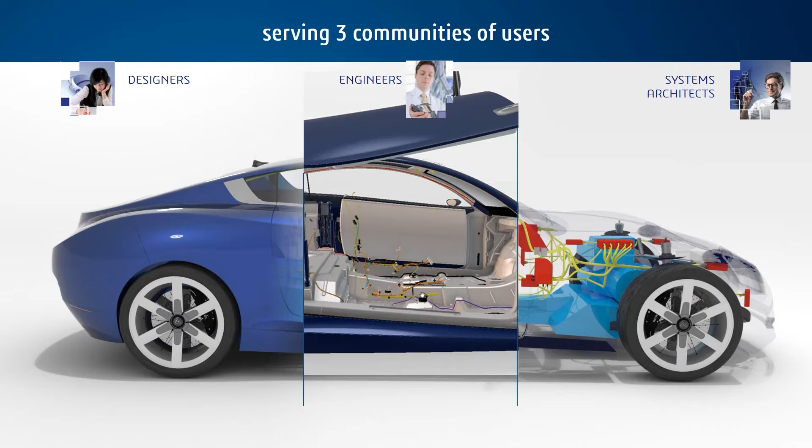How can we contribute to the Dassault success? We are serving 3 communities: the designers, the engineers, and the system architects. Today I'd like to focus, of course, on the designers, but with a strong collaboration to the engineers, because perceived quality has a strong collaboration needed.

But firstly, to understand, before we can move into that, we need to understand the trends and innovation trends of our customers, because those are the trends and demands for new visualization needs - for example, products inspired by nature, new generation of UI and UX, collaboration and social innovation, or new approaches of perceived quality, the topic of today, what we want to talk about.

So those are the drivers for visualization. That means visualization is key. But why is it so key, and why is it so important?

Visualization, nor VR, is not about just making things prettier. VR and realistic visualization is also a communication tool.

So let's have a look at this problem here, what you can see. You have a bunch of people who's talking to each other, and the first one is starting and the last one is totally thinking about something else. So that could be due to language barriers, due to different knowledge. A lot of things could happen why we have misunderstanding.

So communication is key and we need visualization for that. But not only that, it is an enabler for collaboration. Because if we have one common understanding on that level, since we can see a visualizing thing, everybody understands what it is about, and you can collaborate and work together more efficiently.

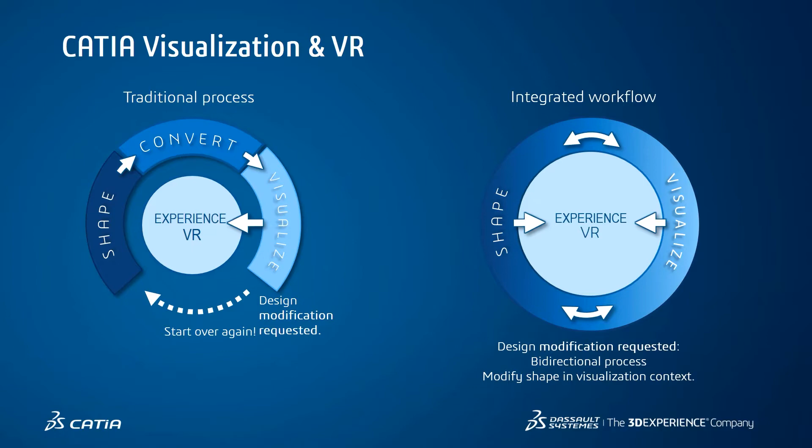So what is perceived quality? Perceived quality needs a lot of disciplines, and I think therefore we can really prove that perceived quality is a great example for collaboration and integrated workflow.

For example, the surfaces, to define the best design related to its functions. And the color and trim, look at that. The definition of the surface to the treatment to choose the best material distribution on the shapes. You have direct connection between both two things.

And then of course, gaps and flush, another direct connection to both, because that defines the product quality relating to its manufacturing process. And everything is related. So collaboration is key.

Not only that, those things are a great example of the design departments. There are other departments involved. I already mentioned that the engineers are involved, and we have a strong collaboration need for them.

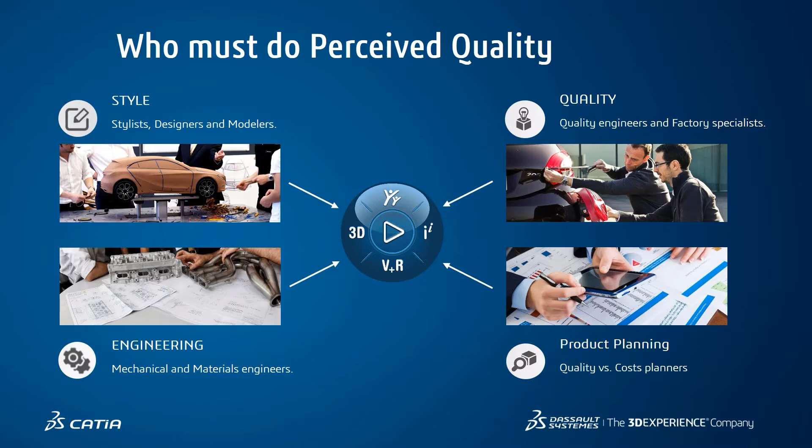Let's have a look when we do perceived quality. We like to do perceived quality in all R&D phases, from start to end. So let's have a look at the timeline.

And if we start with the design, going through the engineering phases to a full technical release, building our first prototype, and then starting to evaluate, can we do this for mass production, and doing our first physical prototype tests, our first perceived quality tests, we are lacking information here in the end. So if we really start that late, we have time issues in the end.

Let's do that everything digitally from the very start point and all the time. Within that, we can collect a lot of information to put into the first physical prototype and support these reviews later on.

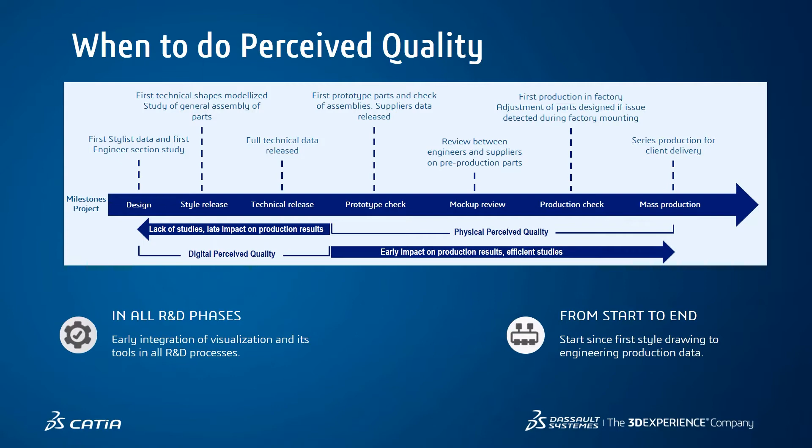So let's have a look at the overall process flow and a closer look between designers and engineers and which challenge comes with it.

So the designers are telling us or defining the overall design language, the colors, the trim, and of course they also define the gap distances. So they define what is acceptable from the design perspective.

The engineers then analyze and can simulate those things. They can evaluate, can we do it, can we not, can we do it like you want in the design department? And then the output could be a prediction based on the Monte Carlo simulation.

This can be done by the 3DCS integration tool. We'll see that just right away. But before we do that, both departments have a clear need of collaboration in the 3DEXPERIENCE platform.

They want to see what happens if we do that, what happens if we do this. So why not put both together and put them in front of the 3DEXPERIENCE platform to do a live demonstration or live review? Those decisions can be made easier by collaboratively working together and steadily improve the workflow of the product and the product itself, of course.

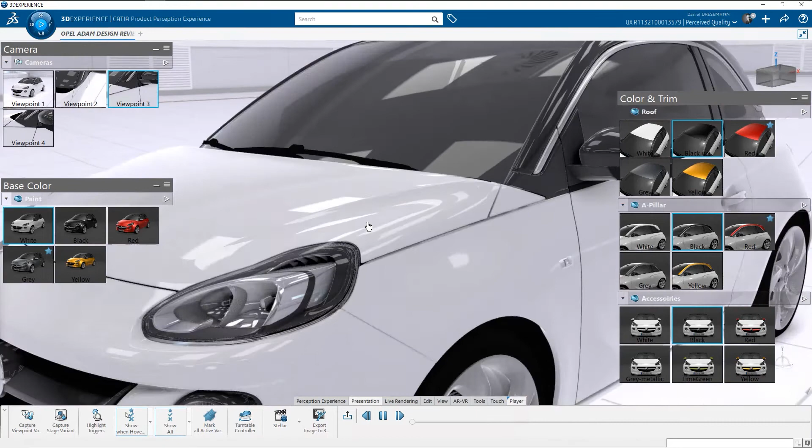I would say there's definitely a big benefit if we use bright colors. So let's have a closer look at these two parts here. Those will be the points of interest today: the triangle patch and the mirror patch.

As you can see, we can still use our free navigation. If we want to capture a viewpoint that looks nice to us and we want to reuse that camera perspective, we can use the capture viewpoint variant, and it will capture the viewpoint for us so we can reuse it in the process later on.

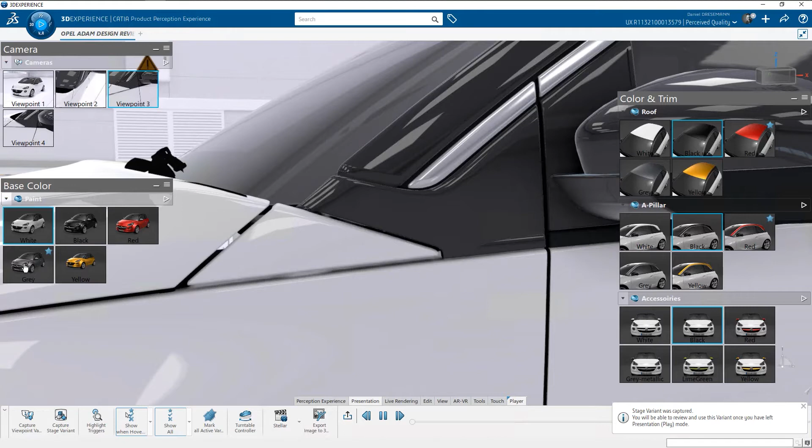So that's pretty nice. I think we can capture this as a stage variant as well. Let's compare this with a dark color. This one will be always black.

Maybe we can have a white A-pillar instead of that, maybe a white roof, and also let's use white mirrors here. Okay, I think we can capture this as well.

And as I told you, we have now done a kind of perceived quality design review, and this is always the first thing that will happen. The designers will tell the engineers, or will go into the detailed analysis of a car and define the acceptable design language, colors, and trims. What is missing is the part of gap distances.

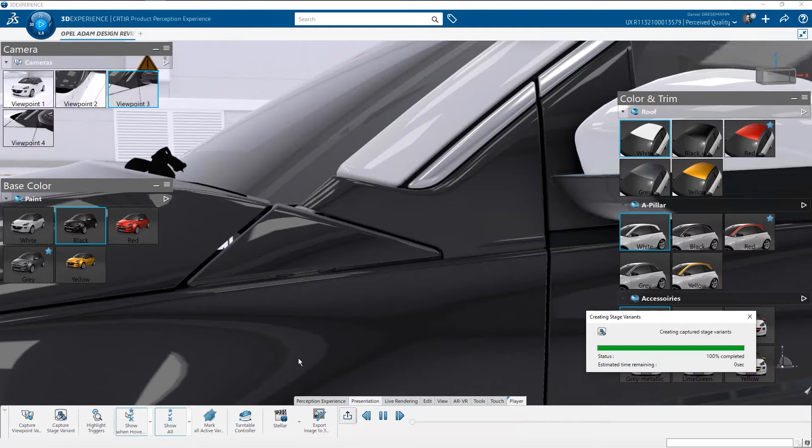So for that, you will see in just a minute that we can have a look at these as well, here in the combination view of those two things. So what we got now after the presentation ended is our viewpoint, our fourth viewpoint, just updated here, along with the presentation of our stage variants.

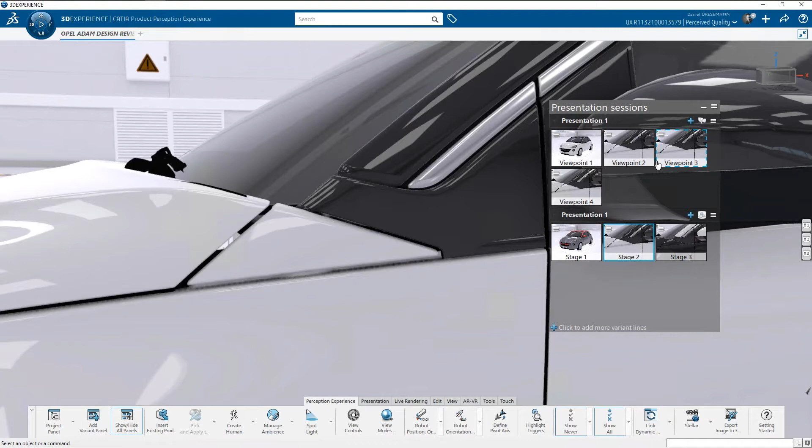So what we can do now is click on this first stage. It will automatically apply the capture variant, with a red roof and the grayish color. Or we can go into the second stage with the new viewpoint we've selected, and jump back and forth between those two colors. So let's start with the white color.

We will restore the windows down, and now we have the side-by-side view. So here on the left, we are able to see the 3DCS application, which opens as soon as I click on it. And here we still have our PPX session available. What I will do, because we like this situation here, this viewpoint, is link both views together at the same point.

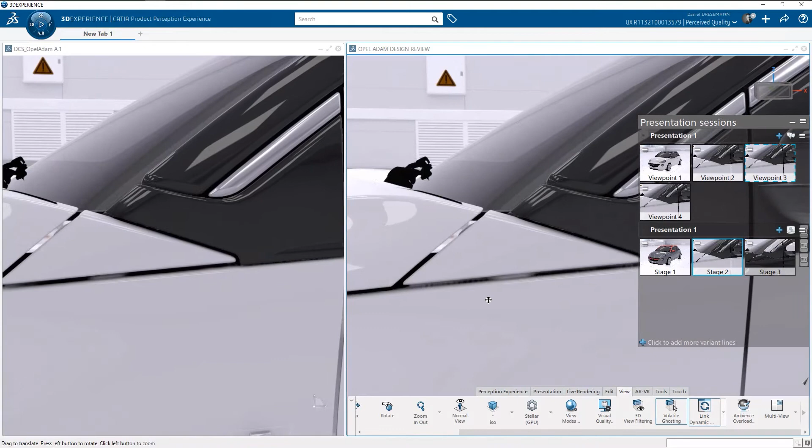So if you move something here, it will automatically move here. Just so you can see that—I think that's pretty cool. Let's position it a little bit on that side so we can see it better. I'll reduce the size of my presentation window, and then jump into the DCS application.

Inside the DCS application, we will use the spec study viewer, which enables us to show some of the spec studies we have predefined as designers. So what does that mean? It means we can view different situations. The designers say, okay, this is acceptable in terms of minimum gap between the triangle patch and the mirror patch, and this will be the maximum deviation.

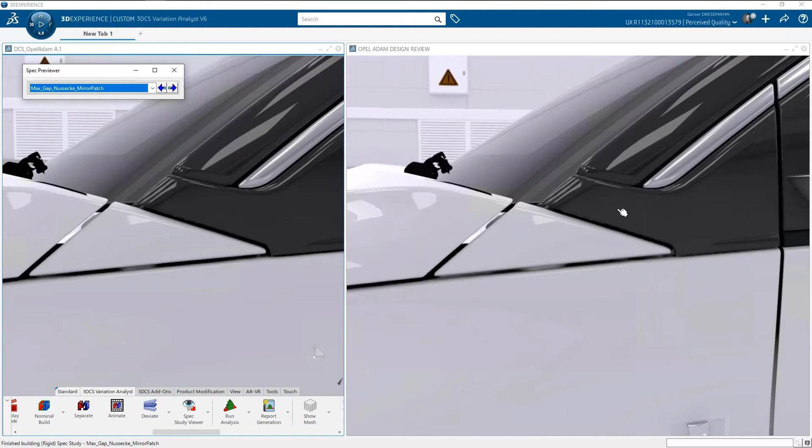Because we want to focus now on the different colors, let's reduce the size here a little bit on the left side. Now we can use different colors to see how they appear up here, and we can really compare those two things just by applying a new color and seeing how this looks. From the designer standpoint, we are happy with these kinds of variations so far.

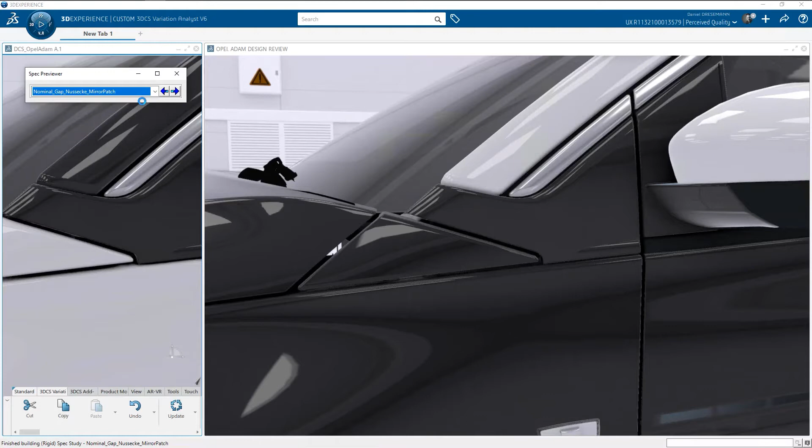In the black color—so let's have a look again at the white color maybe—look at the minimum status or minimum values, the lower specification and the upper specification. From the design point of view, the designers set up a bunch of inputs for the engineers. So the next step will be for the engineers to analyze and simulate what is possible.

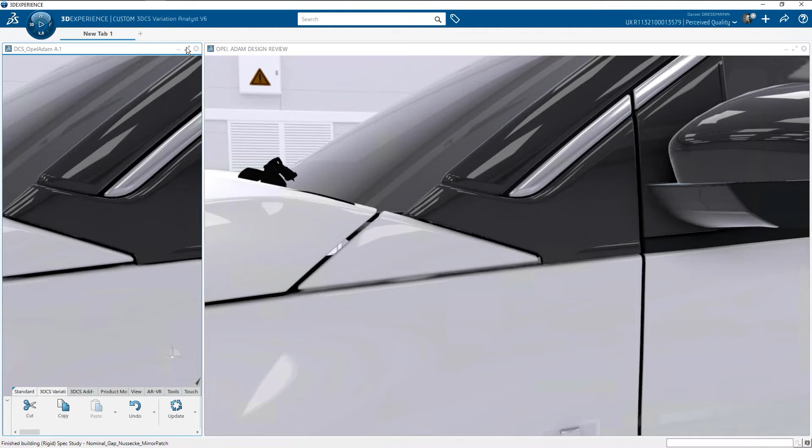And see if this solution, what the designers came up with, is feasible or not. So we are closing this one and extending the DCS application. The first thing we will do then is go into the nominal build and then separate the parts. This should first explain what the engineer is doing now.

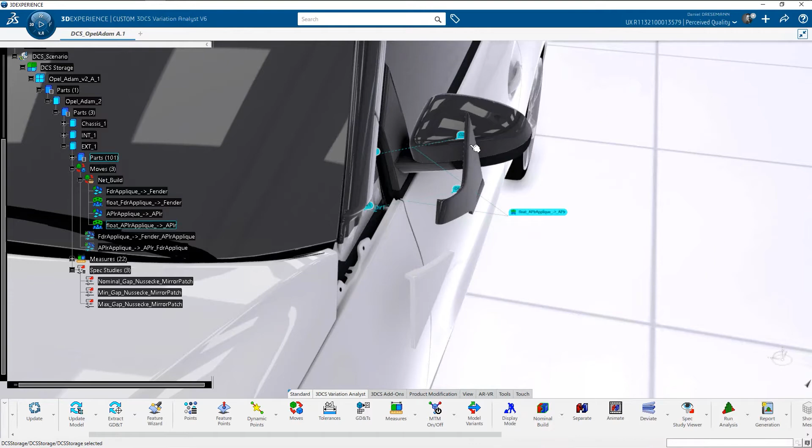So the engineer has to think about how to assemble those two parts to the car. In this case, the first idea the designers came up with was to use each part separately and assemble these separately to its fender—the triangle patch to its fender, and the mirror patch, just let me click on it, to the side body part here behind that.

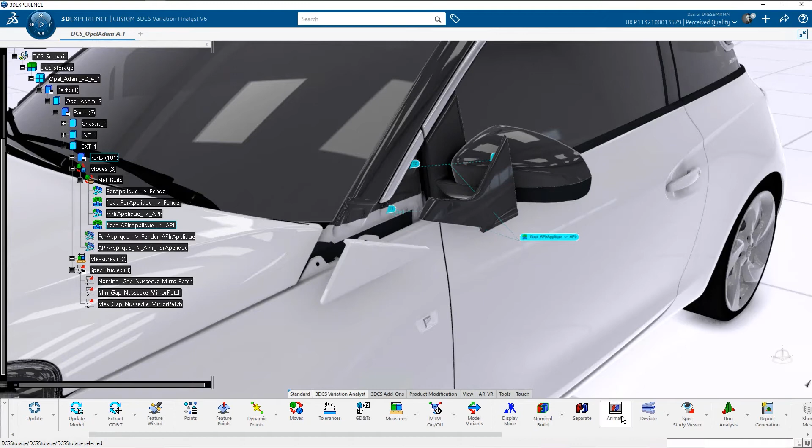You will see that here the bolts and maybe some holes are missing due to the limitations of the geometry we have. So what we can do now is click on Animate in the 3DCS application and click on the full process to show you how this will be built. This also helps get a better understanding of both parts and how they will be assembled.

So this was scenario 1, the initial scenario the designers came up with. The next thing will be to run an analysis. By just looking at the numbers, this is what an engineer is normally doing—he can see we have a total out of specification of almost 26% at the first measurement, which is this measurement here.

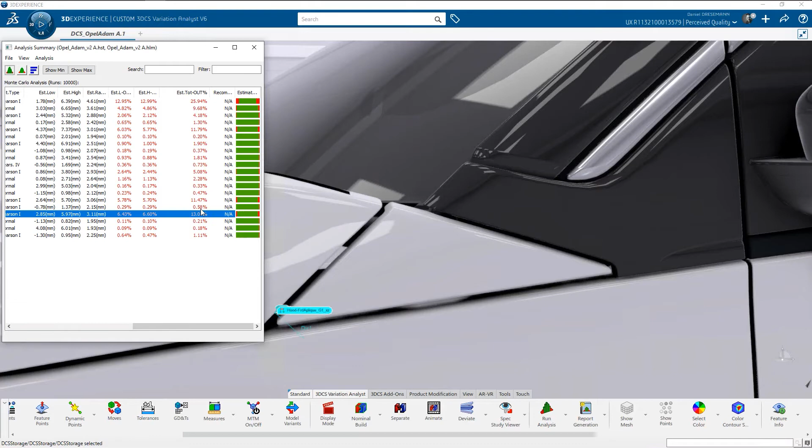We have slight numbers at different measurements, for example on measurement 5, which is the measurement between the triangle patch and the fender. Then we also have one between the mirror patch and the door, and one between the hood and the triangle patch. So those are the 4 biggest numbers.

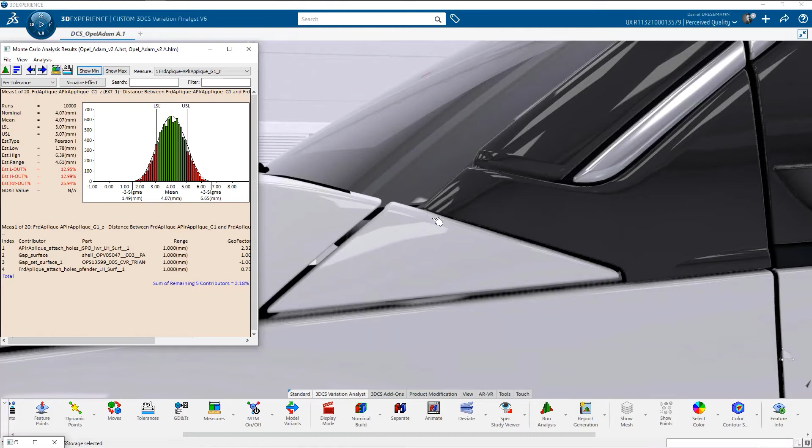Let's have a look at that specific number, because I think that could be interesting to see what that means for us as an engineer, as a result. Let's look at the minimum and then at the maximum, and see if the designers would accept such things. So what we get now is a huge gap here around that, and also here we are getting some issues—a kind of gap here.

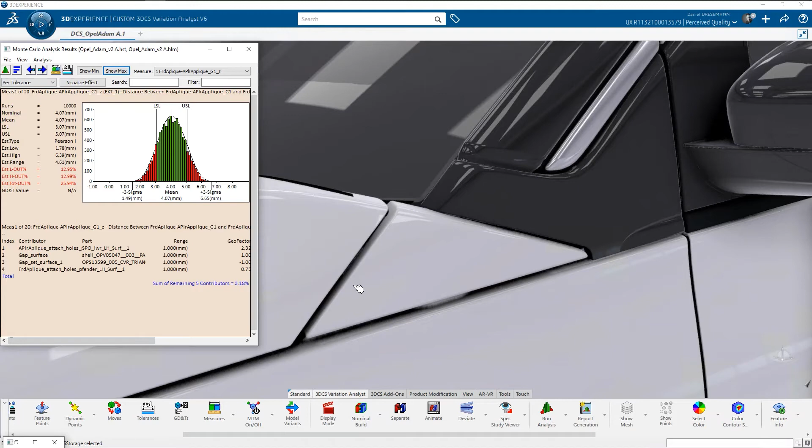You're running into some complications here, which is kind of fine because due to the same colors, we are kind of okay. But let's have a look at the maximum situation. I think that is even a bit worse. We are running into some issues on the top, which looks kind of interesting, but that is a big value.

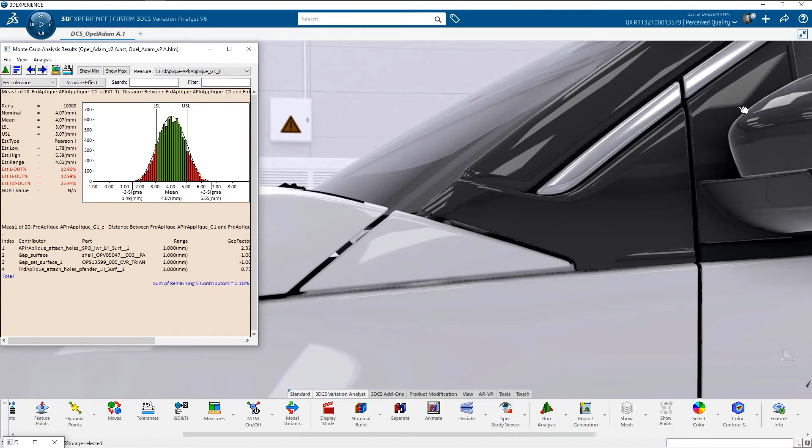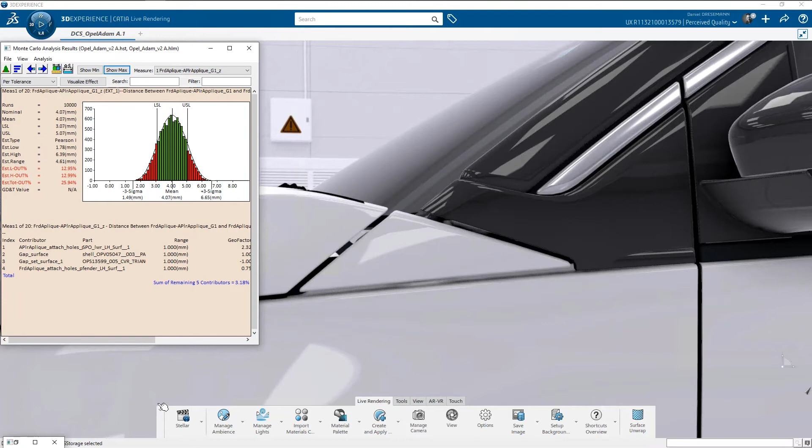So what we need to do now is we are seeing these things without the correct shadowing and reflections. So what we should do now is jump to live rendering, CATIA live rendering, just getting rid of the windows here, not a big issue.

Within live rendering we have all the capabilities. Live rendering is our tool for visualization, where we can set up material, camera position, stuff like that. Because camera position is really interesting for us, this is the first thing we should do. We should save the camera position to our current scene, so we can come back to it and compare later in the process.

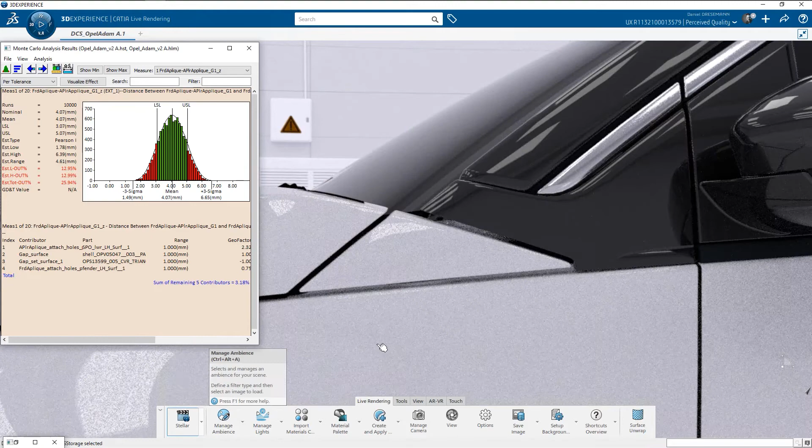Now let's switch on Stellar. And now we can see the differences also in reflections and shadowing. So let's see a little bit from another angle how that looks.

And still we can see the part below, which is kind of not really nice, and I think in terms of quality not what we want to show in the end. So if we compare that with the minimum value, I think the minimum value is not that big of an issue, because we still have nice shadowings, which hide all the parts behind it.

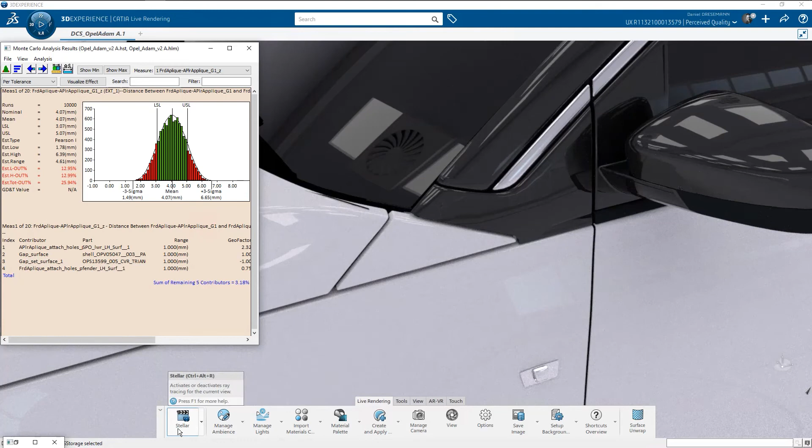Definitely the bigger issue is the maximum value on the right side, because now we can see things we couldn't see before. If we take a look at a specific sample in the middle, you really see how that should look normally. There is definitely something to do on the engineering side, because most probably the designers will not accept the situation.

So what will be the next steps? We are going back to the 3DCS variation analyst. The engineers thought about how we can change things to have a nice gap, because we have an issue here. It seems the issue here and here is not that big, because we have nice shadows and can hide things if they are out of specification.

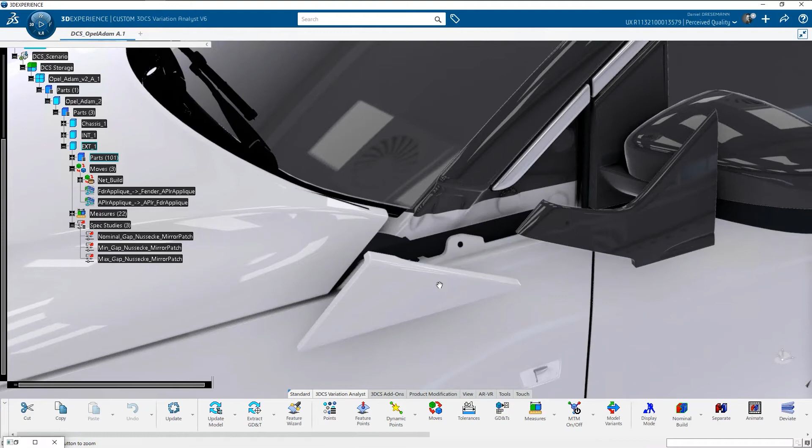So their idea was to separate the parts again and think about a different way to mount both parts to the car. And they came up with two more scenarios. That was the first scenario I just showed you, and the second scenario is the following.

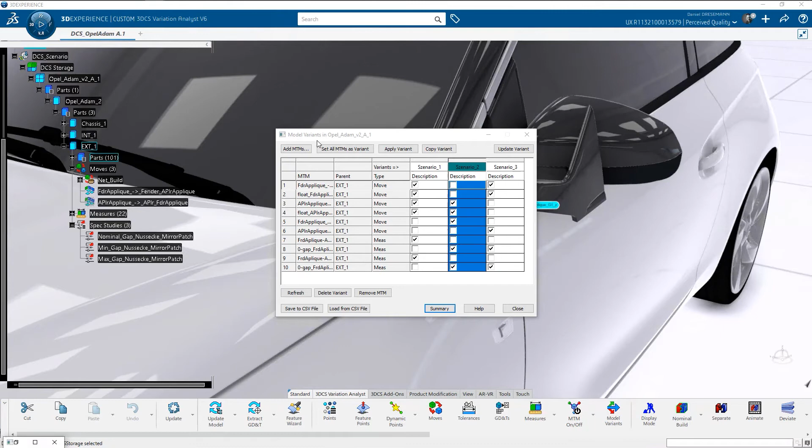As you can see, 3DCS has nice model variants which you can automatically apply and investigate new ways how to build those parts together and get different values out of that. So what we will do, a little bit difficult maybe to see here. Let me show if I can show you that properly.

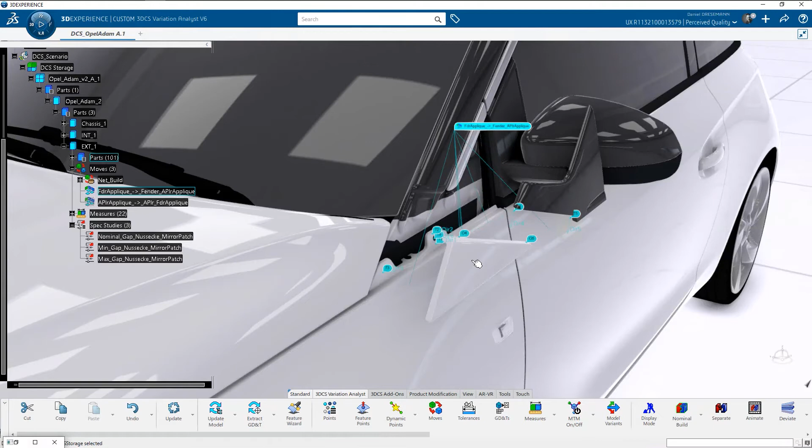Yeah, I think that's a good view. So what the engineers came up with is to take those two parts and put them together always in the same perspective, so that in terms of gaps and flush, we are speaking of a zero gap. We always have the same distance between the triangle patch and the mirror patch.

And then those two parts are attached with a third part. We do not have them at the moment due to the geometry, but just imagine those two parts are connected to a carrier element, and this carrier element is then applied to the fender in this case.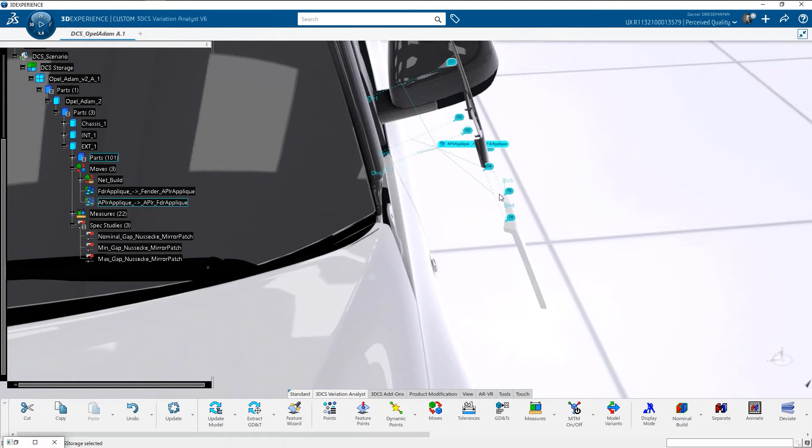Showing you the third variant, I can just click on the moves here, which is then later on the same setup. We again have a third element, the carrier element, but this time we are connecting it to the side body part, so we again have a perfect match between those two things.

Having said that, we are running two more analyses to save a bit of time. I've already prepared that. As I've told you, we now have for the first gap a zero gap, meaning we've set them rigidly together so they have no deviation and are always perfectly fitted together. That means we have reduced the first number from 25% or almost 26%.

We have completely gotten rid of that problem, but we've introduced another one. So here in scenario 2, we've introduced an issue on measurement 5. You can see that here, which is measurement 5, and also here, which is measurement 17.

I think we can definitely say we have to take a look at that. But before we do, let's have a look at scenario 3. Just by looking at the numbers in scenario 3, we can see we also have some issues on measurement 5 and 17, but the numbers are not that high.

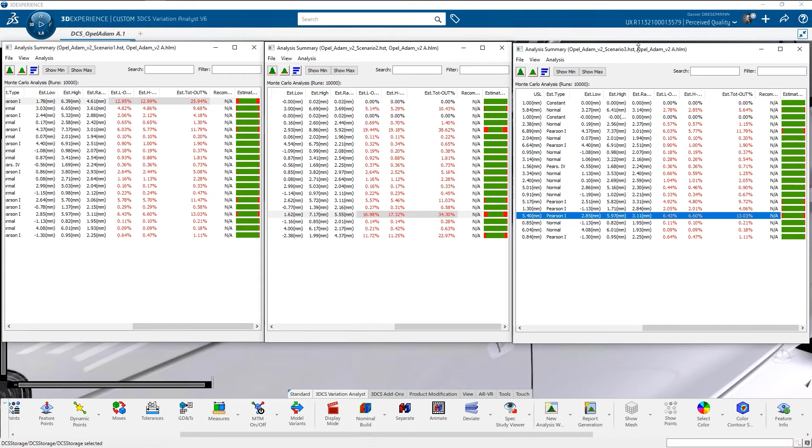So just comparing by the numbers, we should think scenario 3 is the best one. Now let's compare scenario 2 with scenario 3 - not by the numbers, let's compare it visually. And I think here comes the real big benefit.

We can compare not only numbers, as engineers can understand, because engineers do understand those numbers, but now the purpose is that you can use those numbers and show them to designers, and they can decide, is that still an acceptable situation, or do we need to take a look at another solution?

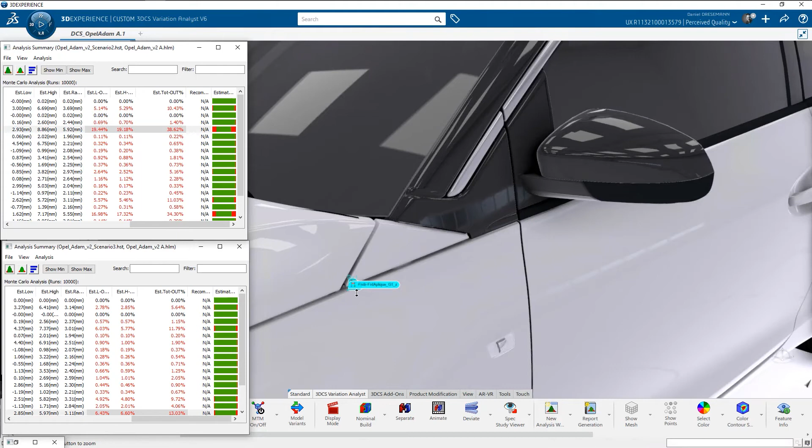Let's take this one, which is 38% out of specifications, and have a look at the minimum situation. We are speaking about measurement 5. Measurement 5, just to bring you back into your mind, is between the fender and the triangle patch. Remember that those two parts are connected together and moving accordingly.

So we're now getting different issues. We get rid of that gap here, which is important because we saw something there. Now we have to check if this is an issue. Let's look at the minimum situation - okay, that's something where we get a flush situation.

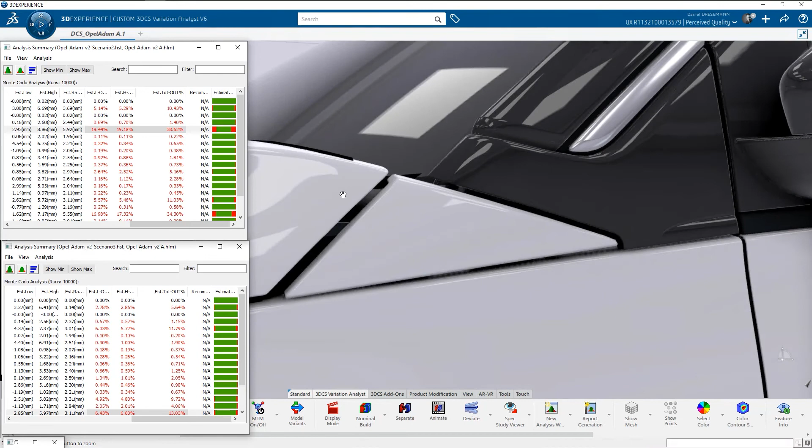Let's have a look. Okay, we introduced a huge gap in here. Let's introduce the maximum situation. Oh, okay, we've introduced a huge gap in here, and I think here that's kind of fine.

Still here, that's pretty small. Let's switch back to this situation. I think, okay, we also introduced something on that measurement as well. So actually, not that good, I have to say.

Let's have a look at measurement 17, which is between the fender, the hood, and the triangle patch, which is even worse, I would say, in this situation. This is definitely not good, and we are definitely out of specification. This is something our design department will not allow.

And this is the cool thing - we can now see this is not only 38% out of specification, or 34%, we can really see that these values do have an issue when we're running out of these specifications.

So now let's have a look at the third scenario, again on that measurement. Okay, this is also pretty bad, actually. But if we compare that, and say we have just 12% out of specification, we're definitely more fine here on that gap.

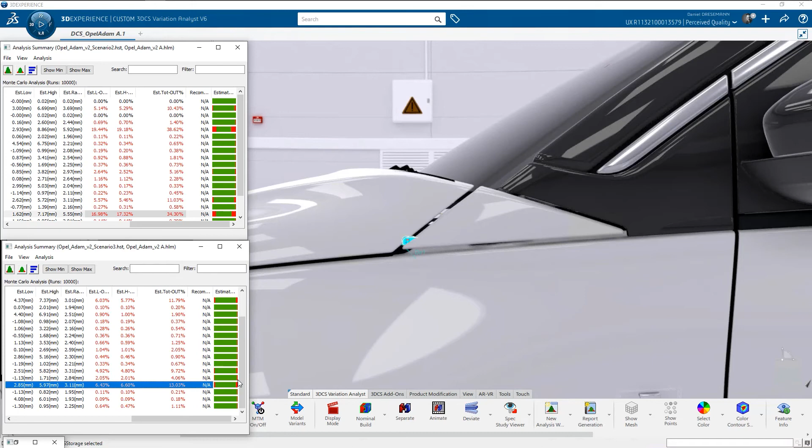And let's have a look at the maximum situation here, which is much better, I would say. We really need to take this into account and compare which is the better solution in the end for our car in our manufacturing processes.

So if we take a look at measurement 17, I think that's definitely absolutely okay. This is a situation we can live with, and designers can live with it as well, because it's pretty fine just from looking at these numbers. The only thing which could probably be an issue is the maximum situation here, because we have a really tight gap and a huge value here.

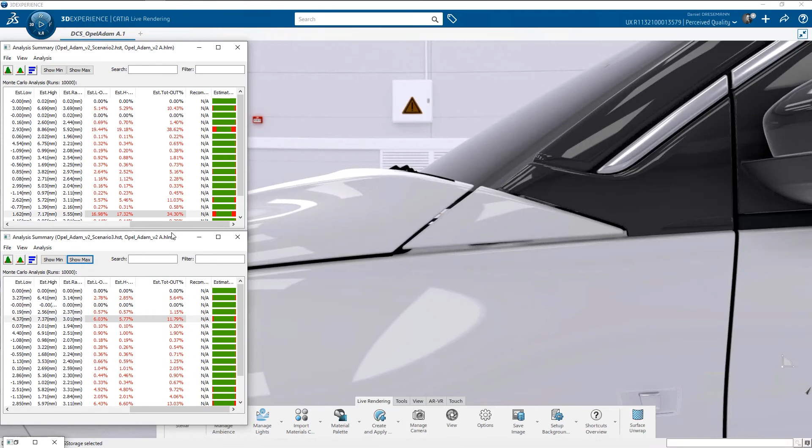So again, we have defined the numbers, we have seen some issues, and now we can dive deeper into this discussion, because what we are doing now is switching on ray tracing again. For that, we will switch to CATIA Live Rendering again, bringing back our windows and clicking on Stellar.

Okay, from that angle, we can now see that we have maybe an issue here, and we can look through the fender into the engine room. Okay, that could be an issue, and this is definitely something worth looking at in more detail.

So the maximum situation, from that point of view, is definitely not that big of an issue, because we have nice shadowing. Both parts are still getting a nice gap for us, and we cannot look through those things. The same goes for this gap, so that looks pretty nice to us, I think.

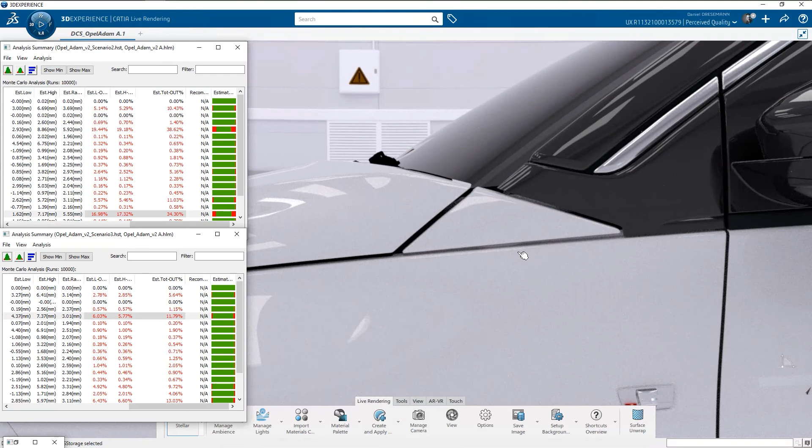Just have a different look from that angle. I think here the flush value, or the flush situation, is not that bad. Looking at that situation is also okay. Here we get a little issue on that side.

Despite the fact that the rendering capabilities are pretty clean and pretty fast already in this case, there's still some graining and some noise available around the part applied, and it's difficult to really see the differences just by clicking on those numbers and getting the differences at the same point.

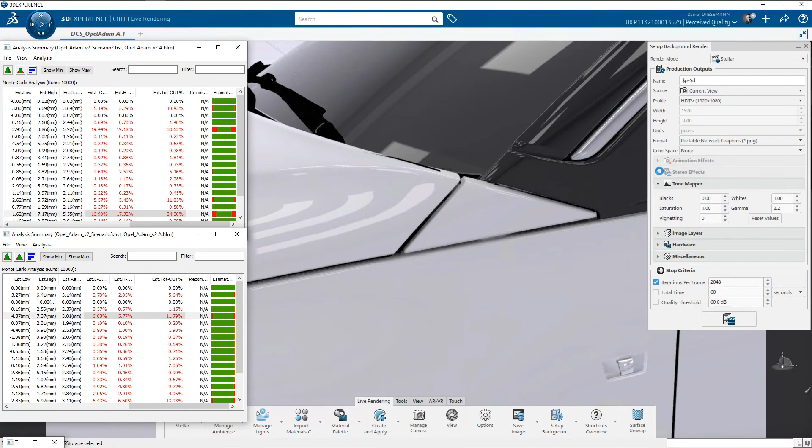So what we will do is use a capability called background rendering. This capability helps us understand a certain camera point of view, and we have already set that up before, using the camera view.

We can apply that to the current view using the camera management tool. Getting in here, camera 4, looking at that from that angle to the camera, and we can define some iterations so that later on, in the offline review process, we can provide those images upfront to some colleagues to discuss.

Additionally to the need for our live review, where we get direct feedback, we are starting to use, for example, the minimum value of scenario 2. We will name that accordingly, and we can submit the background rendering. This will do a rendering in the background, and we can have a look in the presentation afterward to see how this looks.

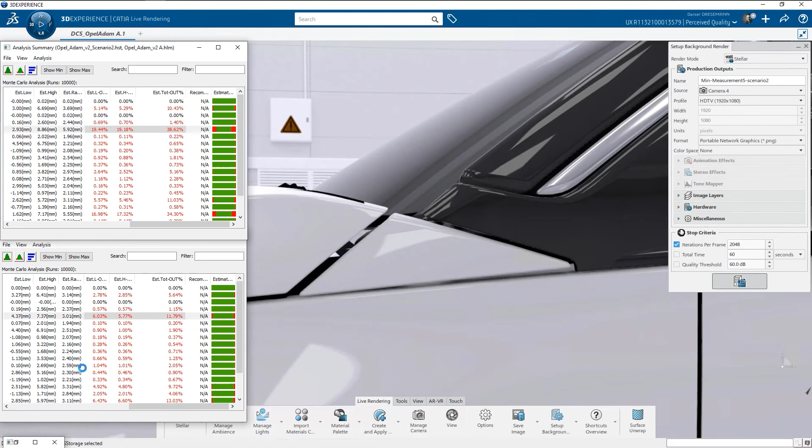I will do this now for measurement 5 and 17, and for those two scenarios, to compare which one is the best. This was my presentation in the 3DEXPERIENCE, on how we can do perceived quality with the help of DCS, with the help of a design tool called Product Perception Experience, and with the help of the Visual Experience Designer, which allows us to simulate and show realistic rendering capabilities.

I think we've shown that this is already pretty nice, and I could prove to you that we can do perceived quality in the 3DEXPERIENCE. Thanks very much, and we will see you just right again in the presentation.

Okay, let's summarize. What we have seen was great 3DEXPERIENCE in action. We have seen live rendering, we have seen how fast we can get to some solutions, where we find the benefit of 3DCS, of the full 3DCS integration.

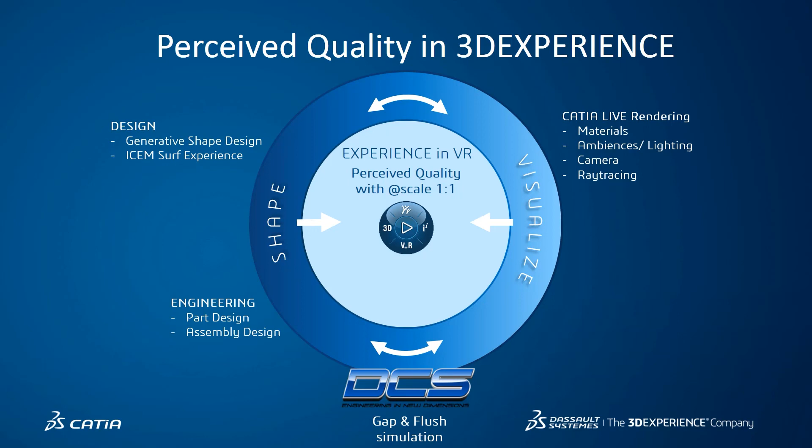So whether it's from the designer's perspective, doing shapes, materials, lighting, ray tracing, whatever it is, or the engineers doing the assemblies, new production assemblies, processes—everything is related and everything is in the 3DEXPERIENCE. We can fully integrate all of these disciplines, and everybody can work together collaboratively as best as possible.

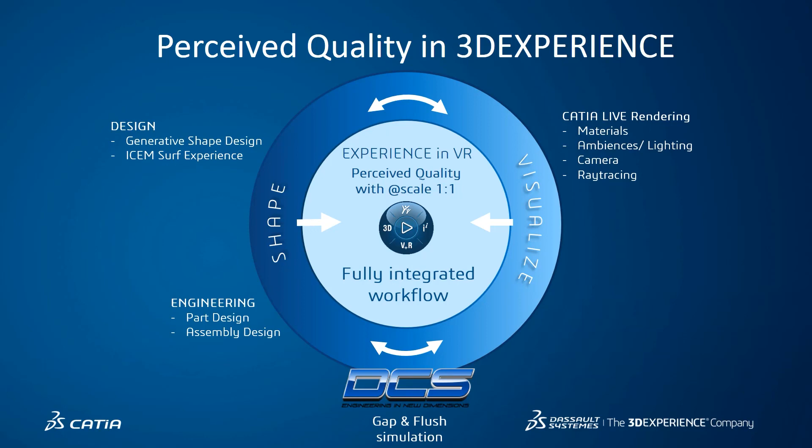And at any time, you can jump into your VR experience. Unfortunately, due to the home office, I don't have a headset with me here. But I think Ben has a video, an older video of mine, where you can see that we proved 3DCS Variation Analyst can work with VR together.

A short disclaimer here at the end. I want to mention all those scenarios were discussed together with Opel. I don't know which solution made it in the end. The nominal situation is the situation as the car was built, so we've tried to replicate it in our own way. That does not mean they are completely right in terms of which scenarios or results they got in the end. It's just an idea of how you can do perceived quality, in this case on this example with different scenarios.